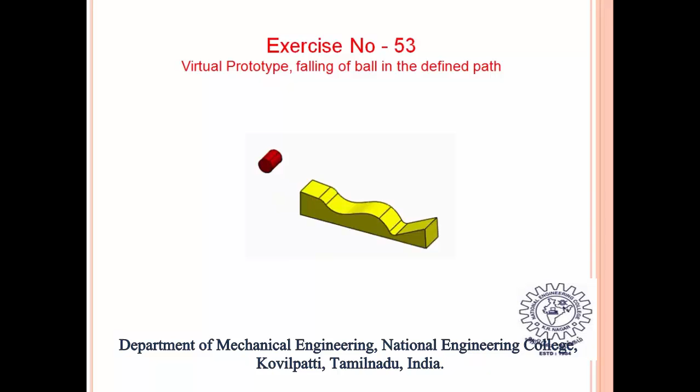First, pick new assembly. Now select insert components and browse for the component named ramp. After fixing the component, insert the component, then browse for the component named cylinder.

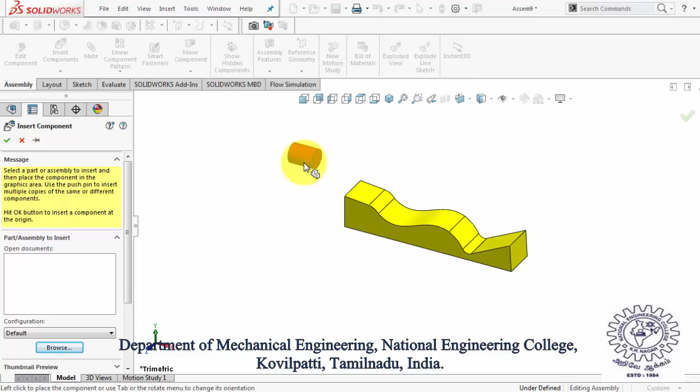Now rotate the cylinder using the move with triad command, giving the specified angle to which it is to be rotated as per the assembly.

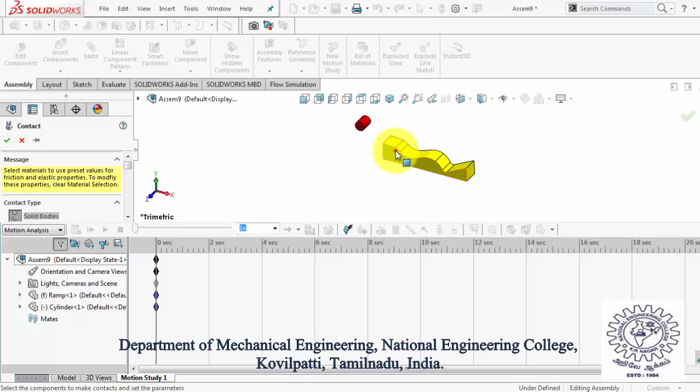Now select motion study, then select motion analysis, then select the contact command and give the components to be in contact. Then specify the material of both the ramp and the cylinder as steel.

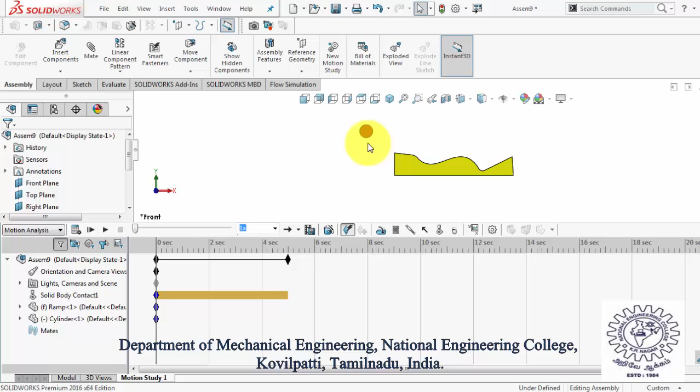After selecting the required material, now specify the exact position of the cylinder over the ramp, from which it is to be fallen off. Check its position in all the planes.

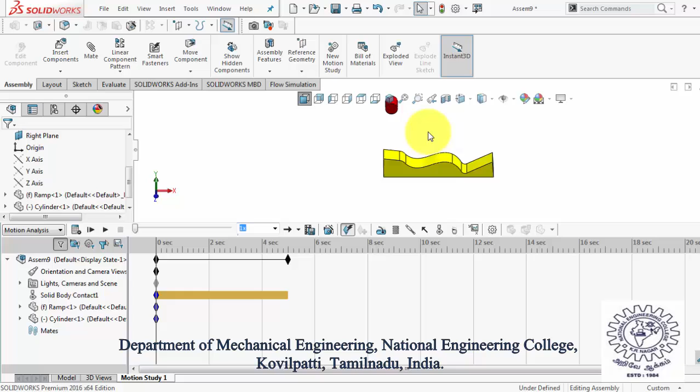Once it is situated at its exact position, now select gravity, then specify the y-axis as the plane of fall. Now select calculate.

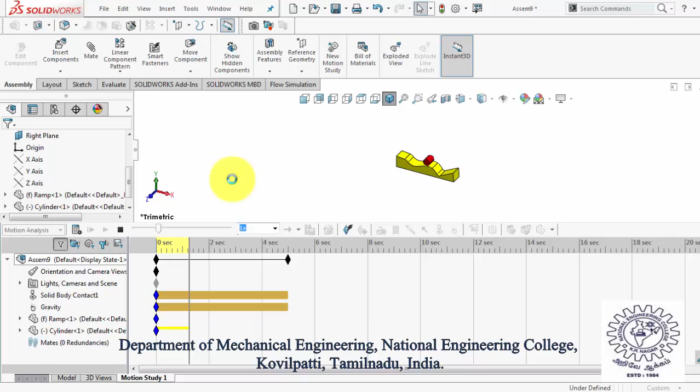Once the calculation of the path traced by the cylinder over the ramp is complete for the specified key point time, finally select play.

That's it. Our virtual prototyping of the cylinder following a defined path is done.